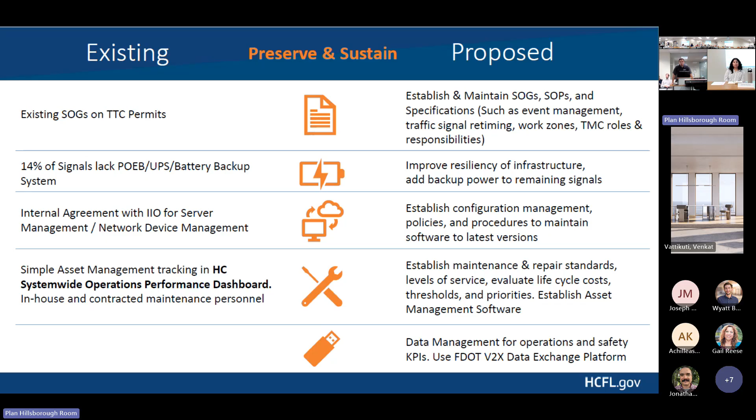Again, data management for operations and safety KPIs. Also trying to work on the vehicle to everything data exchange world, so the CV2X and those servers.

Enhance the system. We've been able to reduce the amount of signals without communications by utilizing other resources through our priority and preemption project, utilizing their field monitoring units which have communications, being able to balance it out and being able to reduce that to 1% of signals without communication.

Again, we want to not only have that as a resource, but also keep expanding on the fiber communication and have 100% coverage while reducing the amount of copper and lack of reliability on the communication side.

Right now we have, this not the latest 592, we have actually 596. The entire system is covered on the preemption system.

At the same time, we're working with FHWA for the ATTAIN grant. It's in the final stage of approval. Once that's done, we'll be able to move forward on deploying new infrastructure, cabinets, and technology. The proposal will be to expand that system to transit, to help them with priority, and again working on road crossing, connected and automated vehicles.

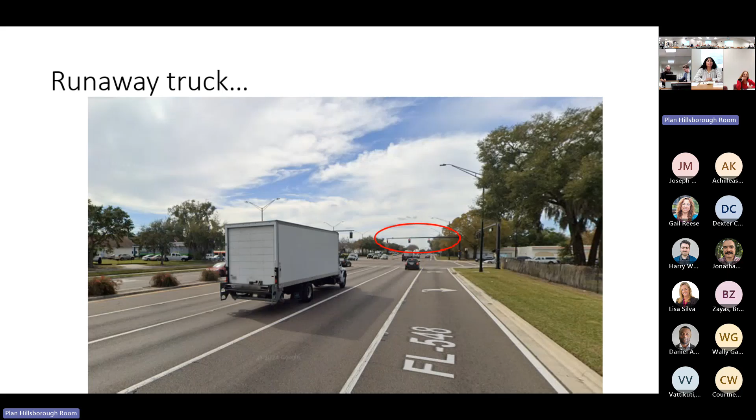Yes, there we go. So I decided to go easy on you folks. These are not horrific scenes, but I do want to at least prove the point that this stuff is happening all day long. And you heard Raphael talk about near misses, so...

Yeah, for folks who are old enough, that was a Starsky and Hutch move that was attempted. You can see that the red was on for quite a few seconds. There was no excuse. Luckily, the speeds were not horrible, so it could have been a lot worse.

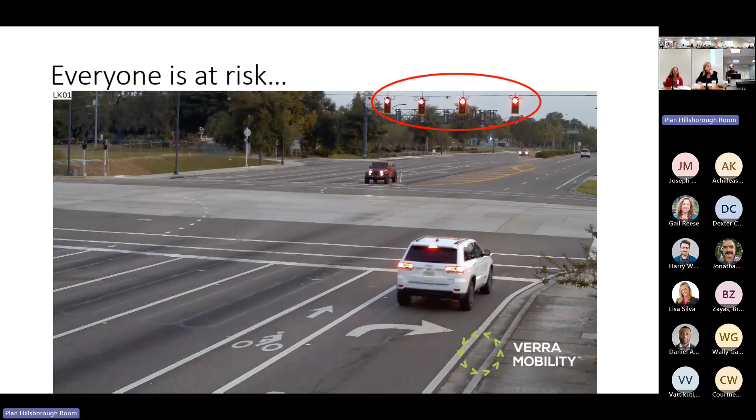Here's another interesting one, and the point of this one is to say that no one is free of risk - I just want to demonstrate that in this scene. This is a very large intersection, as you can see, in Lakeland. Red, and red, continuous red, red, more red, a little bit more red.

Two specific points I want to make about this. Notice that the bicyclist did the right thing - he dismounted and became a pedestrian, particularly for a large intersection like that. It's highly recommended, though not required by law, that you do that.

Can you imagine if any one of those motorists moved a half second faster or slower? There would have been complete chaos, and who knows what could have happened to that pedestrian. It could have been a complete change of conversation - instead of half chuckling about it now, it would have been a horrific conversation with just seconds of difference.

The other thing is that if chaos did continue here, depending on the severity of the injury, that intersection would have been shut down for hours. That's a major intersection in Lakeland, so from a congestion management point of view, it would have been a disaster. People would have had to be rerouted in different directions.

I think Raphael talked about secondary crashes, and thank you for saying that - most likely some degree of secondary crash would occur on top of that. It's like compound interest, it's compound crashes when something like this happens. Luckily, in this case, nothing did happen. It's another near miss, in my opinion.

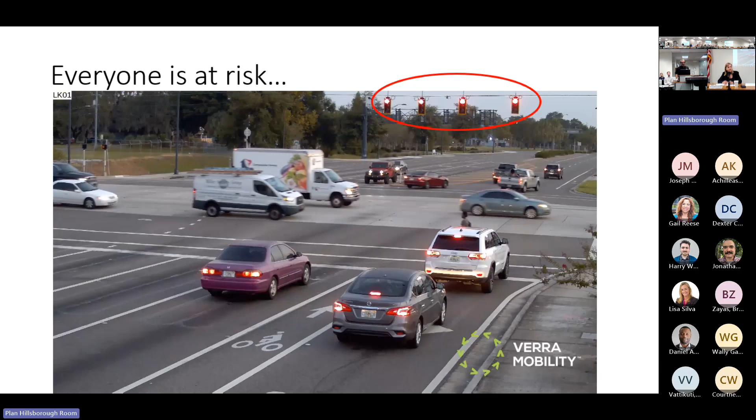Now this one's a little bit more graphic, so just want to prepare you for that.

In yellow, red, lots of red, continuous red - it's red. And this one did crash. Now fortunately, it looks like - I didn't see the postscript on this - it looks like they were able to walk away from that crash.

As everybody knows, kinetic energy is a factor in crashes, and so is the vector, the angle. Luckily, the angle was such that it wasn't a pure T-bone, it was kind of slightly off angle, hence the damage and injuries were somewhat muted - not zero, as you can see. We don't know what the injury level to occupants might have been, but the bottom line is it's not good.

In this case, they naturally got out of the intersection, which is kind of interesting, and that made it a little less impactful on the chaos associated with the intersection. The other one, not - I'm telling you right now, if the other one struck, that would have been a disaster, horrific in terms of congestion management as well.

I don't mean to be overly dramatic, but it was a near-death experience. That truck just zoomed by me like a blur, just zoomed right by me and really got me going.

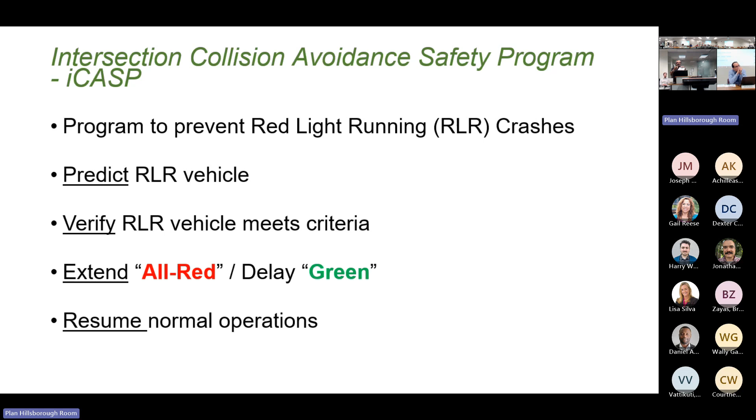Typically, because it's an instantaneous change and not a continuous cycle-after-cycle change, the return to coordination is almost instant. Never truly instant, but very quick because it's spontaneous, not perpetual. That makes a big difference. It's a smart approach: do it when you need it, not all the time. There's no point delaying people constantly.

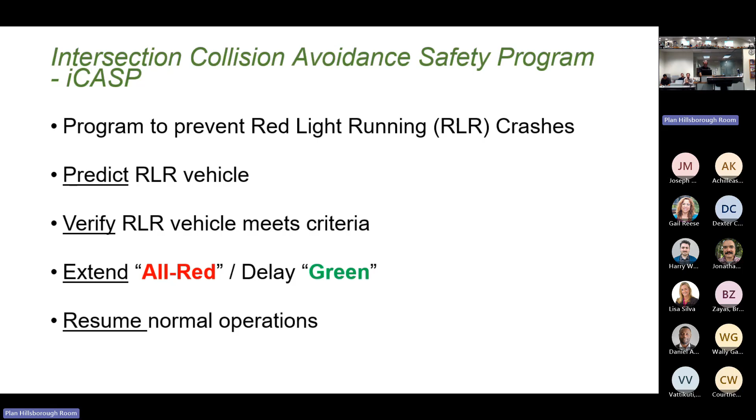Any Seinfeld fans in the audience? I used to live by Seinfeld, dubbed the show about nothing. Well, I sort of dubbed this the safety program about nothing, because you don't even know it happened. You're minding your own business at what should've been a green light, delayed 3 seconds or so, and most people won't even feel that, unless you've got a stopwatch timing the all-red phase, which I doubt people do. But someone asked if this is a good time to be a traffic engineer. Maybe more motorists are becoming traffic engineers, timing things - or they think they are. Well, they have a driver's license, that makes them automatic, right?

Very quickly, this is similar but kind of the opposite of the dilemma zone. What I found interesting when I started talking about this is that the dilemma zone, generally speaking, is when we approach a stale green light and don't know what to do - should I go, should I not go? Hence the dilemma zone. The mechanics say: okay, we're detecting you, we're going to extend the green time. But of course you as a motorist don't know that. It's not like you got a message saying 'Angela, you're good, I'm giving you 4 more seconds, knock yourself out.' No, you don't know. So there's still a dilemma in the motorist's mind. Luckily there might be safety benefits, I'm sure there are studies to prove that, which is great. I'm all for it.

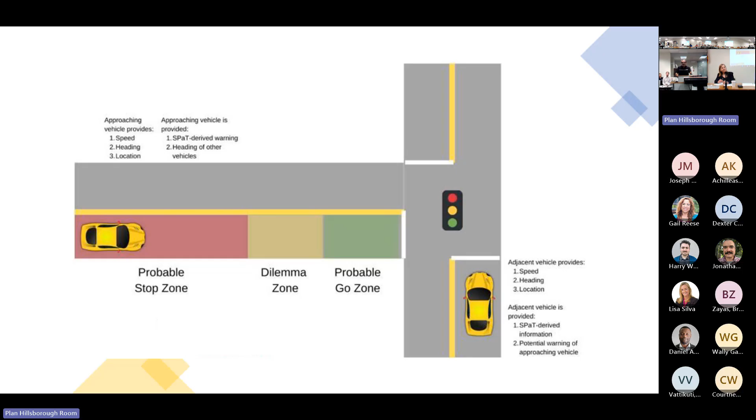Our approach is the opposite of the dilemma zone. Instead of giving more time to green, we're giving more time to the all-red phase to keep everybody back in the first place.

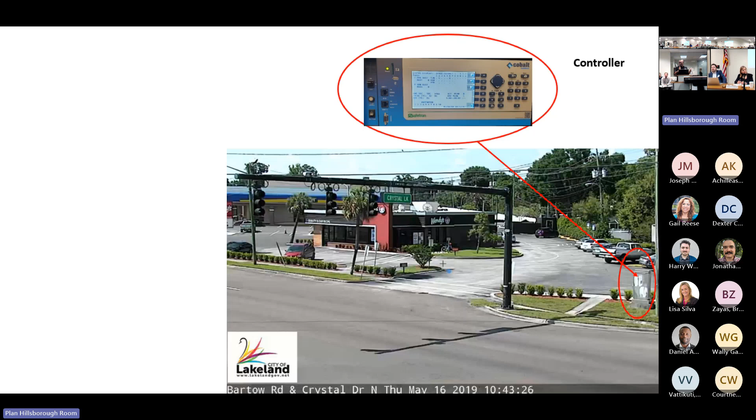We started with four intersections, all on state roads, as you can see there - I don't need to go into it. Very quickly, how it works: in the case of Lakeland, the Econolite controllers were the higher-end version. Didn't have to be, we just chose it - I wanted it to be originally consistent so there wouldn't be any flaws. The sensors would read the speed and distance of the vehicle and then make a decision back with the controller as to whether there's a necessity to extend the red, and by how much.

We found the delta cost of the sensors is approximately $25,000 per intersection, roughly speaking. I think the costs have actually come down now, but I could be wrong. Certainly it's worth investigating. If there's a Q&A session, maybe think ahead about what the base cost of standard sensors might be - unless you know the number now. We're looking at a delta of about $25,000 per intersection for the sensors, so there wouldn't have to be an upgrade to the sensors. Maybe think about the benchmark for more traditional sensors currently in place - it'd be an interesting curiosity.

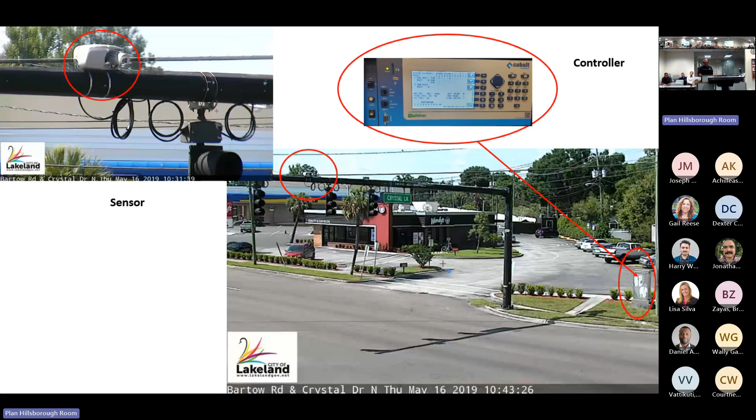Basically, you can see the time clock going, in this case down to 3 seconds, and then the perpendicular green goes on. Hopefully by then, by the calculation, enough time has gone by for the offending vehicle to be long gone from the intersection, or at least out of the danger zone at the very least.

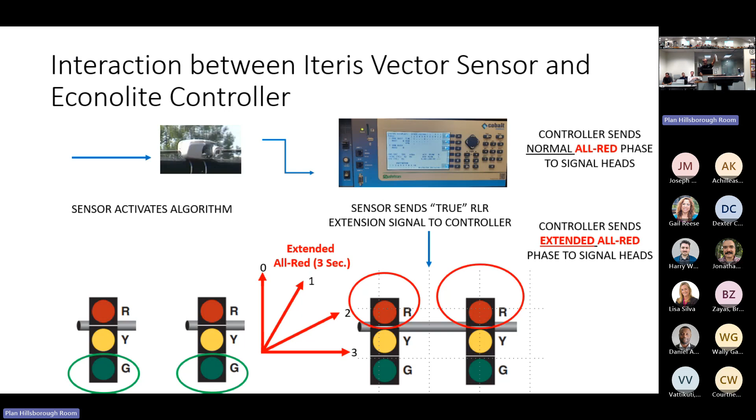Is iCASP new? No, because we did not go rogue, I promise you. I looked back at MUTCD a little bit worried, saying, Oh my gosh, Angela, what have you done? It's crazy, you've gone rogue, this is nuts. No, it's right in the MUTCD, about as clear as can be.

Probably because of the dilemma zone is what I'm going to guess. I don't know the full history, but this goes back to 2012, the 2009 edition followed by the 2012 edition. The duration of a red clearance interval may be extended upon detection of a vehicle that is predicted to violate the red light signal indication. So basically, that's iCASP. It's basically given us the blueprint to say yes, you can do this.

It's optional. You can do this. It's in the book. I went back, I got a little worried, I'll be honest with you, before these presentations, and said, Hey Joy, can you just go triple check, please? Maybe somebody threw a line in there, somebody got upset and threw a line in there. And no, according to the 2023 edition, it's still in there. So to the best of my knowledge, no one has taken it out. It's still there and available.

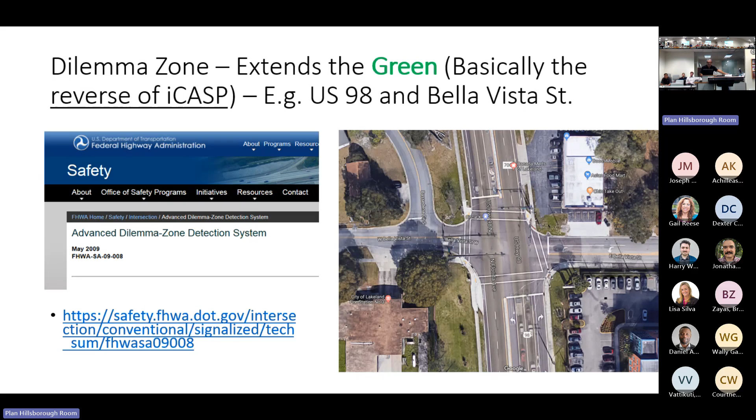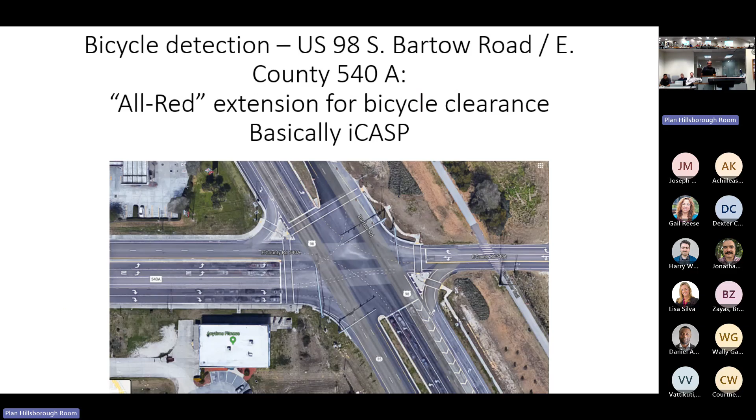Couple of quick examples. This is the dilemma zone, that particular intersection in Lakeland that was operated. So that's the opposite, right? Or the extends the green rather than delays the green. Another interesting thing I didn't even know about, but I was doing my research back around 2019, there was even an application taking the dilemma zone in reverse for bicycles. Because oftentimes bicyclists could not make it through large intersections like this one here, so there would be a delay to the perpendicular traffic which would allow the bicyclists to go through. Much safer than, well there's no such thing as safe, but much safer than originally planned.

We took the system, working with District 1, to what's called TERL, the Traffic Engineering Research Lab in Tallahassee. We wanted to make sure that even though it's in the MUTCD, we had the right to do it. We thought, oh my gosh, this is way too new, let's go to TERL and make sure everything's in order. So we did get approval for iCASP, because at first all we did was data collection, and then we were able to actually implement the system, which was very, very cool. Very proud about that. Ready to go.

Well, here's what's interesting, this is on me, Angela Rao. I wanted to have a backup plan so that I could prove the data by data alone and have a visual confirmation. So I chose to make a criteria that I'm only going to install sensors where I have red light running cameras. You don't have to, there's no requirement, absolutely not. We just felt it would be more appropriate to have a confirmation of the data matching.

In fact, I had another slide I didn't want to show today, that proved that, oh yeah, gosh, Fred Rethel really did run the red light at exactly 10:14, 15 seconds, right? So there'd be confirmation. That's the only reason why we chose the red light running camera locations. There is no obligation to do that, you don't have to do that.

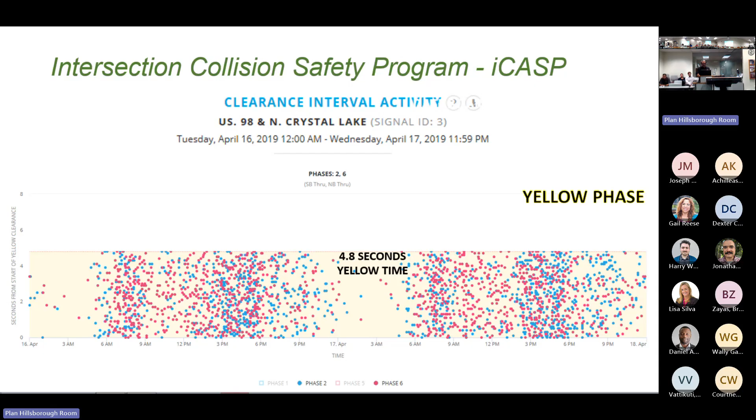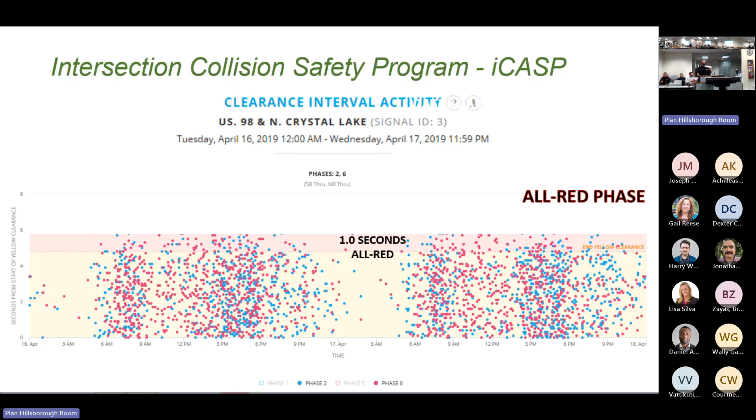This is informational, for folks that love this stuff. This is just a depiction where each dot is a vehicle going through the intersection during yellow time. In this particular case, there was only 1 second of all-red time because of a railway track immediately adjacent to it. Since then, DOT has increased it, I think, to 2.5 seconds. The point of this slide is that all of those dots above the word red are runs after the perpendicular green went on, and this is just one little tiny intersection, one little tiny city, every single day.

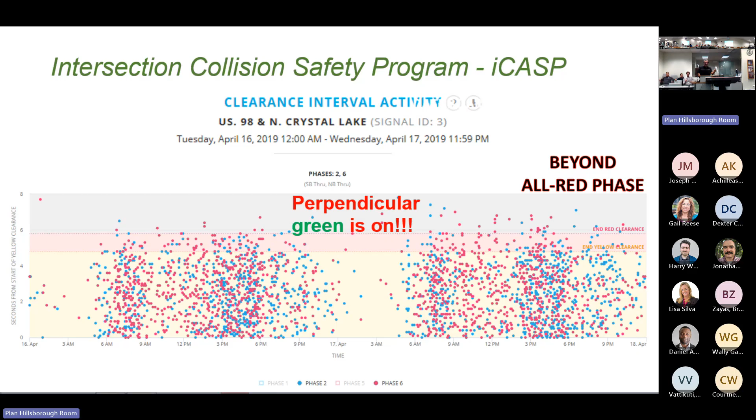In fact, from the looks of it, our studies showed that almost 100% of folks are obedient during green and yellow. And look, I'm going to tell you right now, I've run red lights. I've done it in my driving experience. I'm not perfect, it happens. Luckily it's like a half a second or a quarter second, barely into the stop bar. So these folks are probably doing that, and that's fine.

So we've got about 99.71% quote-unquote obedience. This is where it gets a little scary. The 0.29% in this one intersection turned out to be about 50 vehicles a day, every single day on average, running the red light after the green went on.

In fact, I have to tell you, walking over here from my office - what's the typical LPI in the city? About 3 to 4 seconds, 3 to 5 seconds. So I walked over here on Kennedy eastbound, south side of Tampa, and I already had my walk signal. I was starting to go, so within the LPI time, I saw the back of a vehicle to my right. They must have run it by at least 3 to 4 seconds, because I already had 3 seconds of LPI time. So just walking over here, it's happening all day long.

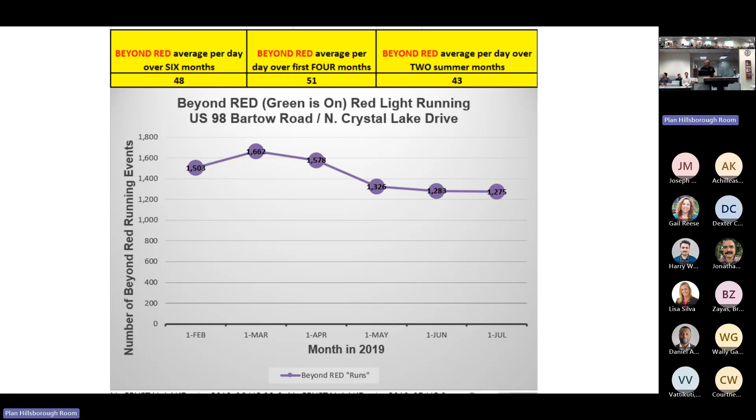So this is what's going on, and I have a little bit more detailed data here. It turns out to be something like an average of around 1,500 vehicles for the month at that particular intersection. So that's a lot of probability for near misses, and near misses converting into a crash. So, a lot of data.

So because of the data, and because of getting all those approvals, we were able to apply for a grant in 2020, and we got a $500,000 grant awarded to us to expand the system. So we went from 4 to 25. Almost all of them are on state road intersections - I think there are 2 near Lake Somerset that were pure city plates out of 25.

So it doesn't matter where you want to install them. Obviously, at least speaking with City of Lakeland, it seemed more appropriate to put them on state roads, because that's where most of the probable cause would be.

So it appears I missed all the fun, because after I left, the city, along with District 1 and several law enforcement agencies, decided to shut down the intersection at US 98 at 3 a.m. and deliberately run red lights on purpose. They have all the fun, man - I was not able to do that. So there were 2 tests.

One was, of course, to see if the system worked in real life - we knew it did electronically, but they wanted to make sure it worked in real life. And frankly, more importantly, the perpendicular green did delay as planned.

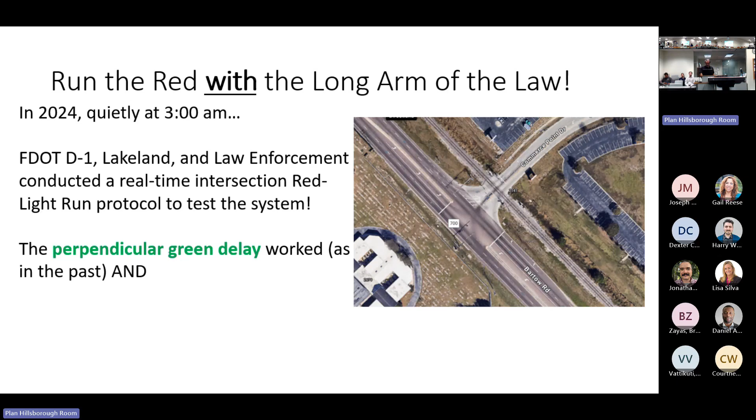The second test I found even more interesting: from a connected autonomous vehicle perspective, the signal went to any device that had the app associated with it, and of course they have their own built-in app. I think my successor, Teresa Schwartz, had an iPad. We couldn't do it in 2019 - there was too much latency to get the message through. Now the latency is almost zero - not zero, but so close to zero. They were very proud of that, and I thought that was great.

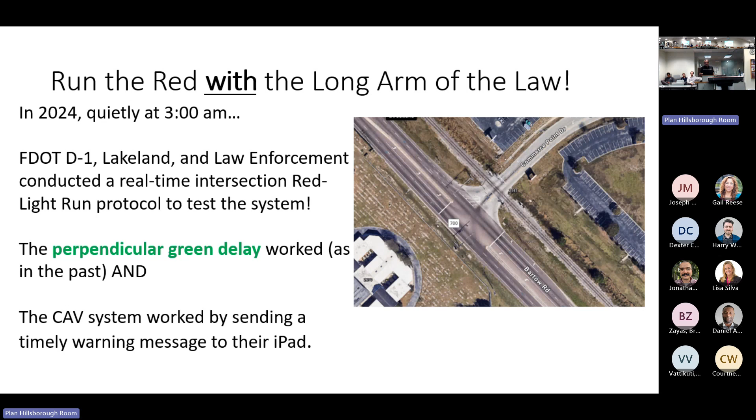So for example, if you have an in-car system, an iPhone, a mobile phone, or an iPad, even for bicyclists and pedestrians, they could get the alert if they had the app, and at least be told, hey, this is why you're being delayed, please stop.

So next steps, they're telling me now that they're going to be doing continual data analysis for before and after crash data, of course, and near miss data, very important. Really trying to follow up on the Starsky and Hutch results we saw earlier, and see if we can make amendments. I want to acknowledge Stephen Davis from District 1, Teresa Schwartz from City of Lakeland, and Dan Pressler, who is in-house at District 1, and was a big factor in working on this project. So happy to take any questions.

As I mentioned earlier, if you don't mind, out of curiosity, do you have a sense of what the baseline cost typically is for a more standard sensor system, like a camera system? Is it in the order of 20,000 or something like that?

It's only 25,000 for an intersection for that advanced detection, video detection. Okay good, so I just wanted to get a sense that there would be an incremental cost because the sensors would be upgraded to be able to do the computation and the communication with the control. I just wanted to give you a sense of costs there. But with that, I'd be happy to take any questions or exploratory thoughts.

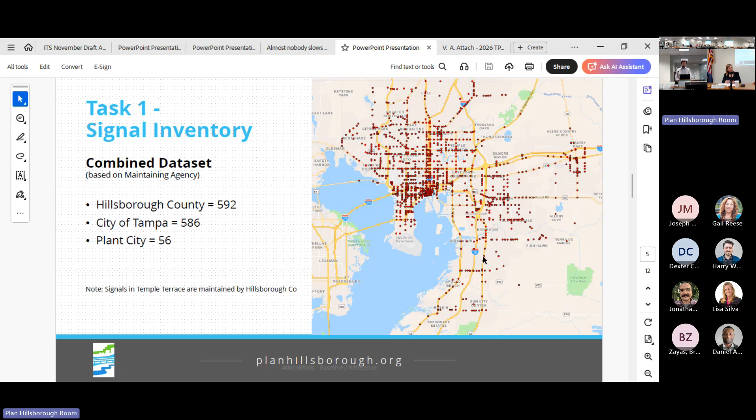So a lot of this is coming out of Hurricanes Helene and Milton, and we do have a focus on resiliency as well. We've looked at the structural components of this, the type, condition, and age. For the cabinet, the age, the mounting type, and the mounting height, that was a new point for me thinking about it after the hurricanes.

I noticed in front of VIA headquarters and the Tampa Operations Center that one cabinet had been raised on the pole, mounted about 3 feet up, give or take. As we were starting to scope this, that was one consideration that really started to occur to me.

The location, whether it's within a floodplain, on an evacuation route, or within the hurricane wind zones, is already part of our practices. I believe the mast arms or most of the city of Tampa ought to be within that wind zone, and a large portion of unincorporated Hillsborough County is too. And technology such as flood sensors.

Task three is the ranking of intersections. We focused on the most vulnerable locations, assigning a priority rank to signal elements, assigning a score to each element, and comparing the overall resiliency score. We would assign a number to a mast, a number to concrete, a number to straight wood, and a 1, 2, or 3, then a score to each as well.